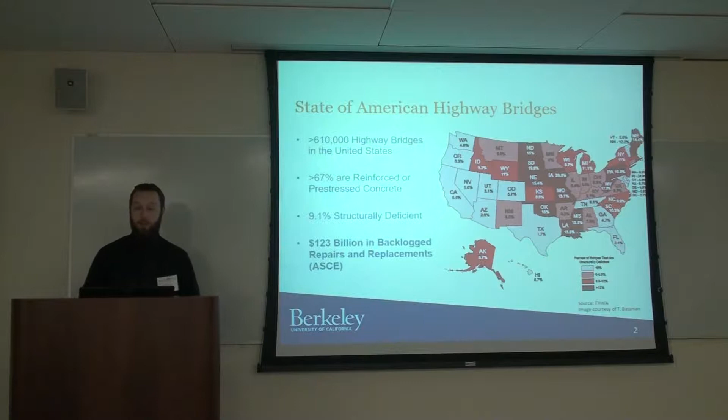Almost 10% of these highway bridges in the United States are structurally deficient, meaning that they require significant repair or replacement. The ASCE estimates that there is about $120 billion in backlogged repairs and replacements that have yet to be undertaken.

When we compare these facts with the USGS seismic hazard map of the United States, we can see that 34.7% of deficient reinforced concrete bridges are in states with high seismic hazard, and close to 80% of those bridges are in states with moderate to high seismic hazard.

Given that building codes don't account for deterioration of buildings and bridges directly, it's surprising that such little research exists on structural performance of deteriorated bridges.

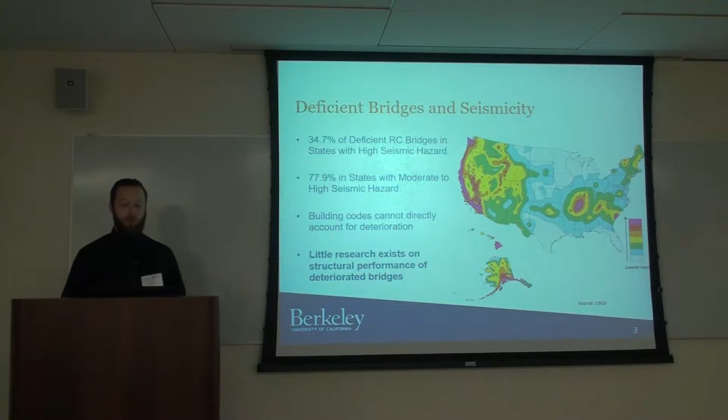Specifically, I'm looking into corrosion in highway bridges, and corrosion is a leading cause of damage to bridge structures, specifically in reinforced concrete bridges.

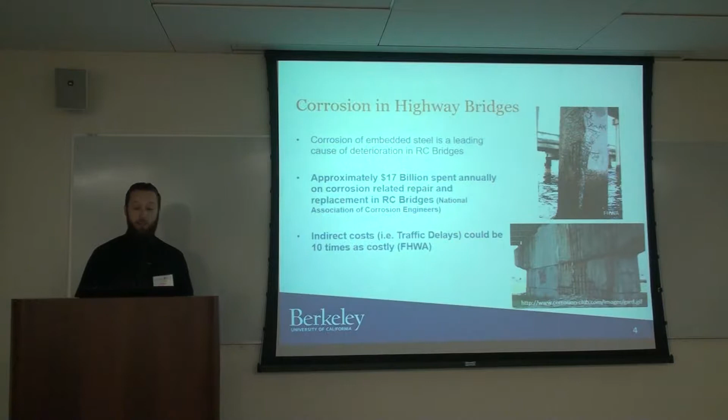The National Association of Corrosion Engineers estimates that around $17 billion is spent annually on corrosion-related repair and replacement in reinforced concrete bridges alone. If you look at indirect costs, which are much harder to quantify, the Federal Highway Administration acknowledges that costs such as traffic delays could be 10 times as high.

I know this isn't a corrosion conference, so I'll try and get into the hybrid simulation aspects, but briefly I just want to touch on a little background. The corrosion process in reinforced concrete can be broken down into two stages.

You have an initiation period where the reinforcing steel is passive due to the high pH of concrete. During this period, aggressive agents like carbon dioxide from the atmosphere or chlorides from seawater or de-icing salts are penetrating into the concrete cover and will eventually depassivate the reinforcing steel.

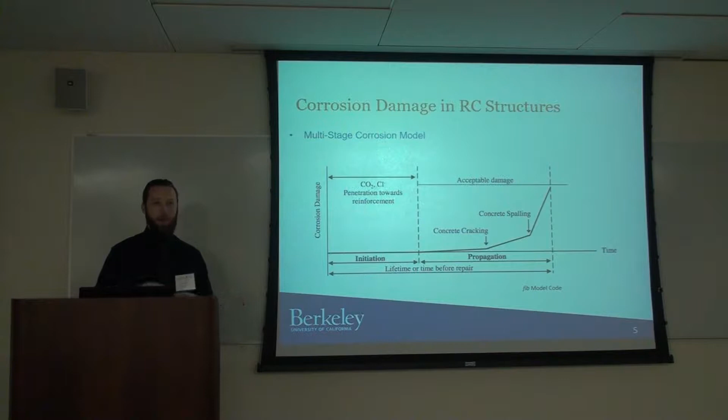This takes us into the propagation stage, during which rebar is actively corroding until you have cracking in the concrete, at which point the damage is accumulating at an accelerated rate. You eventually reach spalling of the cover, and then at some point you reach some acceptable limit where the structure either has to be repaired or replaced.

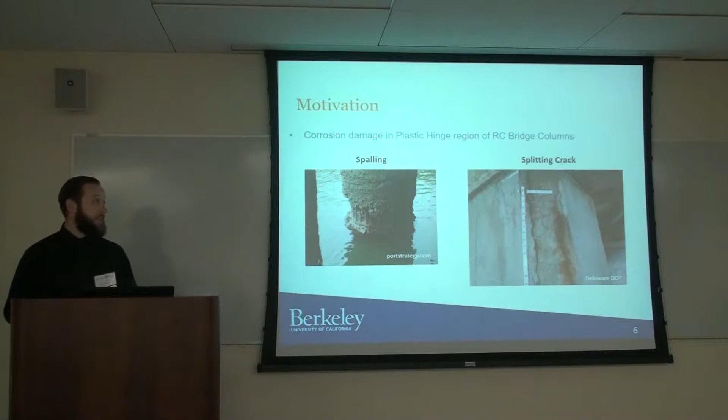Just to give you some examples of damage, here we see some significant spalling, and even before you reach spalling, you can have damage that affects mechanical behavior, especially splitting cracks, which deteriorate the bond between reinforcement and the concrete, and this significantly deteriorates flexural behavior.

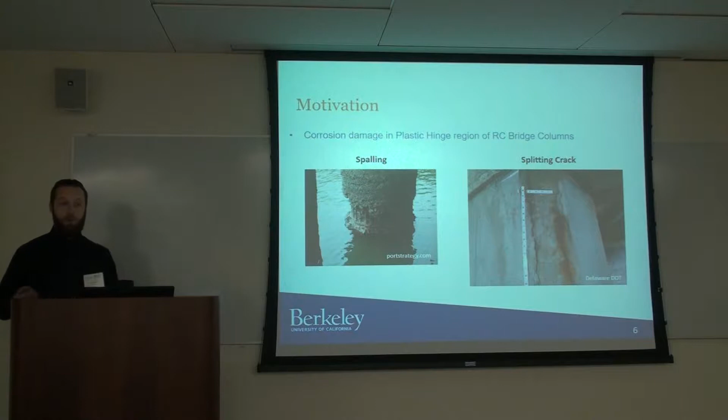This is significant because this type of damage can often be found in the plastic hinge region of reinforced concrete bridges, and given how important these regions are to drift of bridge structures, it's important to understand the interactions between corrosion damage and seismic performance.

There are a lot of challenges when addressing this problem. First is that concrete damage due to corrosion is difficult to model, and it's difficult to incorporate this into a structural model. Additionally, corrosion damage occurs slowly, which adds to the difficulties with large-scale testing, it being on its own difficult and cumbersome, even without considering complications of corrosion.

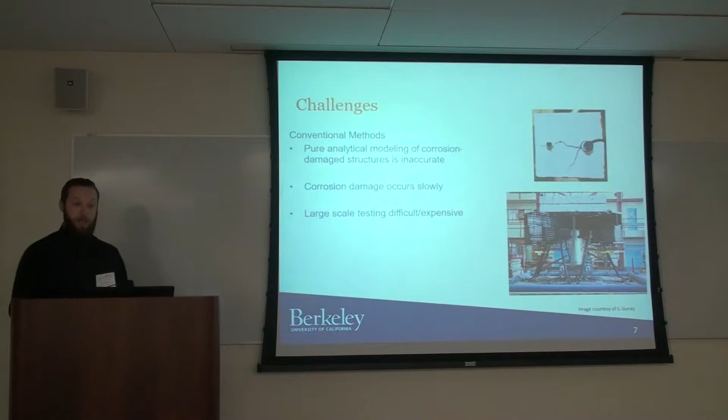That brings us to a unique solution of hybrid simulation, where we can scale down from full-scale testing and focus on just an isolated component.

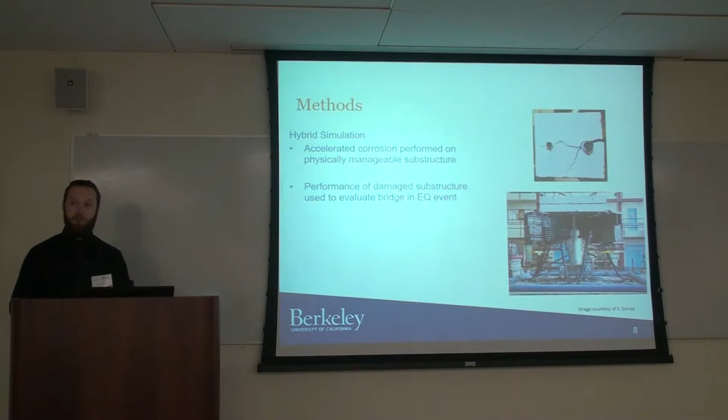In this experiment, we're considering accelerated corrosion on a physically manageable substructure, specifically just the plastic hinge region of a bridge structure. Then, after inducing corrosion on a specimen, we can use hybrid simulation to determine the influence of damage in this region on the overall performance of the bridge.

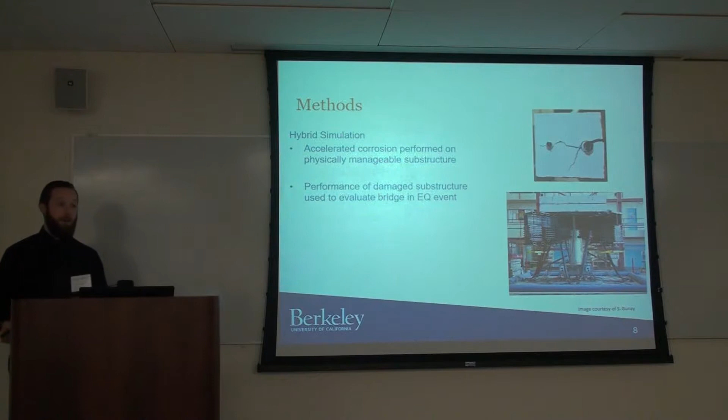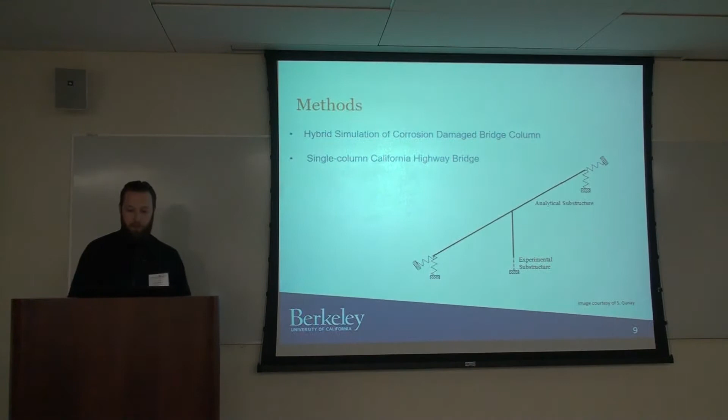So the bridge of interest that we're considering is a single column California bridge structure. We have an analytical substructure, and we've replaced the plastic hinge with an experimental substructure.

This is just a concrete column section, and it has been separately corroded with splitting cracks induced, similar to those that we saw in the image I showed before.

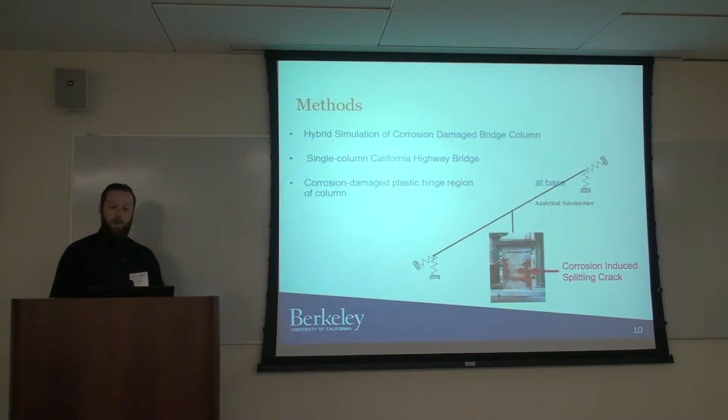If we replace this portion of our OpenSees model of the bridge structure with this pre-damaged substructure, we can capture the complexities of damage and incorporate those into our OpenSees model without having to explicitly model them.

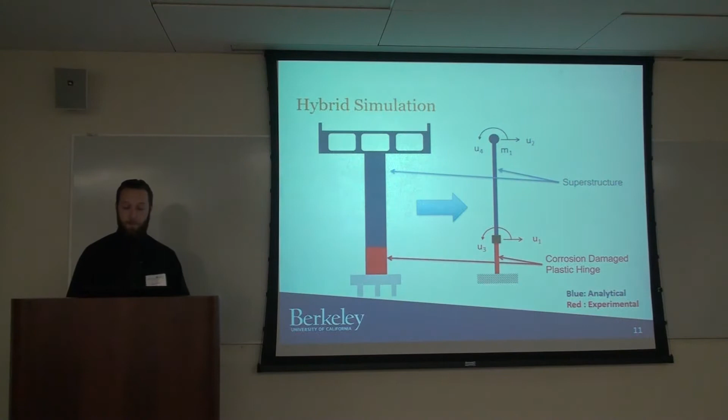The way we are doing that is we have a 3-actuator setup, and 2 actuators are used axially, applying both the axial load as well as rotation to apply moment. We have a lateral load to apply shear and also moment to the substructure.

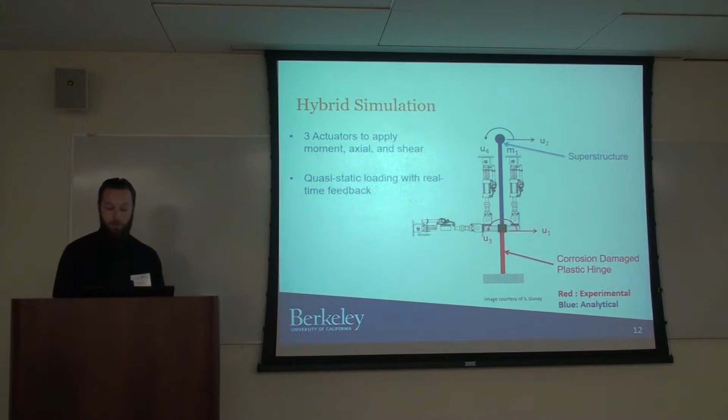A closer look at our test specimen: we have scaled down with a linear scale factor of around 8, so 8.37, and we've taken a prototype column and scaled it down to be more physically manageable.

We have a 7-inch section with reinforcing ratios shown here, and we've cast some high-performance concrete end caps to make sure that our boundaries remain elastic and don't contribute to damage that we're seeing when we're conducting the test.

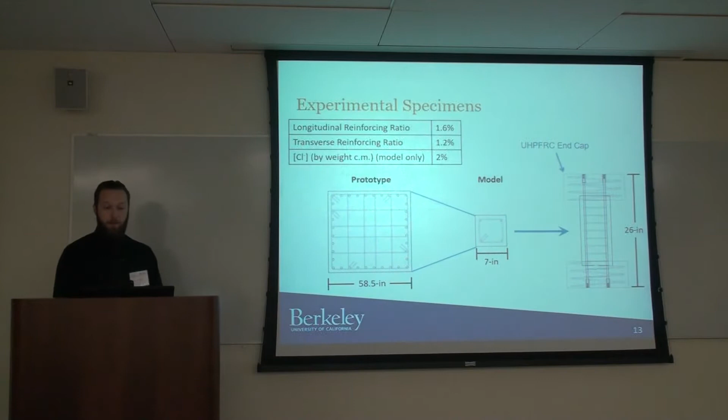So to look closely at the environmental conditioning, this is how we are applying corrosion damage to this specimen. We're immersing it in a saltwater bath, and then using a potentiostat to apply a constant current. And while we're doing that, we're measuring the potential, which you can see fluctuates here with the formation of cracking in the specimen.

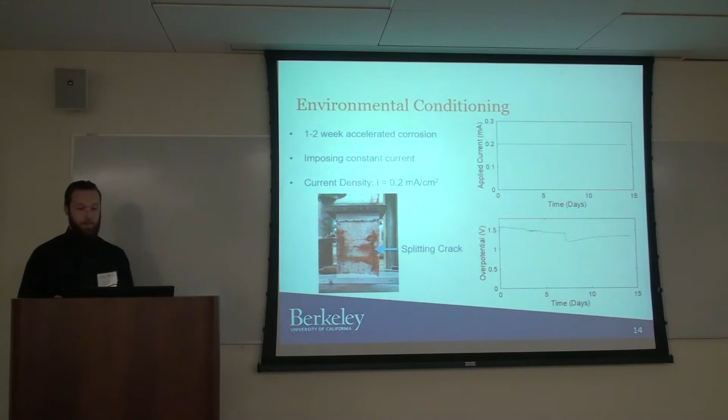Just to reiterate the importance of these splitting cracks, this is the behavior that we are trying to characterize with this study. Splitting crack damage has been shown to significantly reduce the flexural capacity of elements. So we want to see in a bridge structure what the overall performance is, and how this influences behavior when this damage occurs in the plastic hinge region.

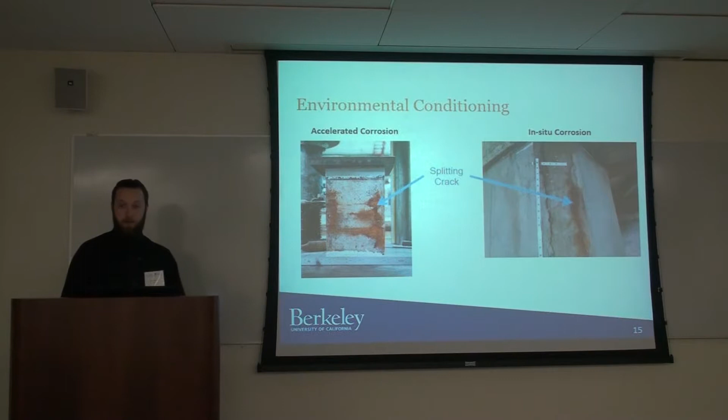So we are testing this in Davis Hall, and we're aiming to test this week, so we're testing actually on Thursday. But to give you a flavor of what the test setup looks like, again, you see our actuators in the vertical direction as well as lateral, and our substructure, which is here shown.

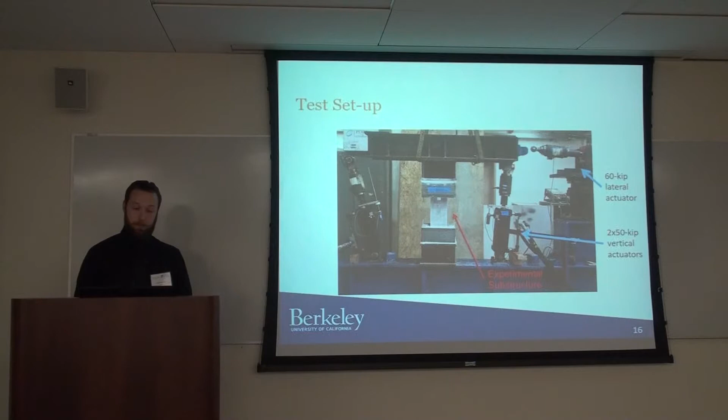And so more background and future work that can be done with this. In addition to determining the behavior of existing structures, we also see this as a great opportunity to use hybrid simulation to investigate different systems and specifically different materials and how they would perform in a similar situation. My research group focuses on construction materials, and so we like to implement novel materials as a solution to issues such as deterioration due to corrosion damage.

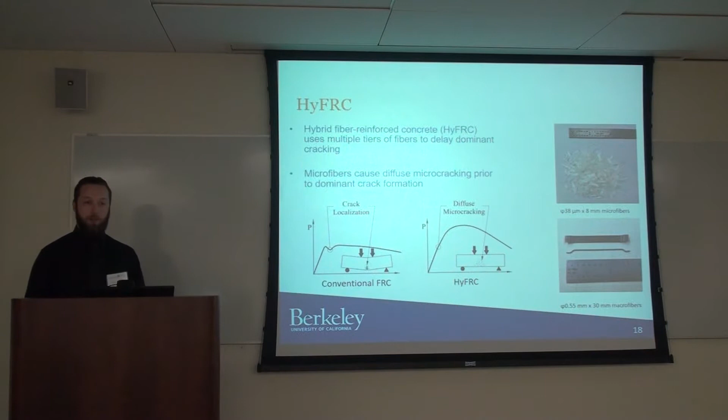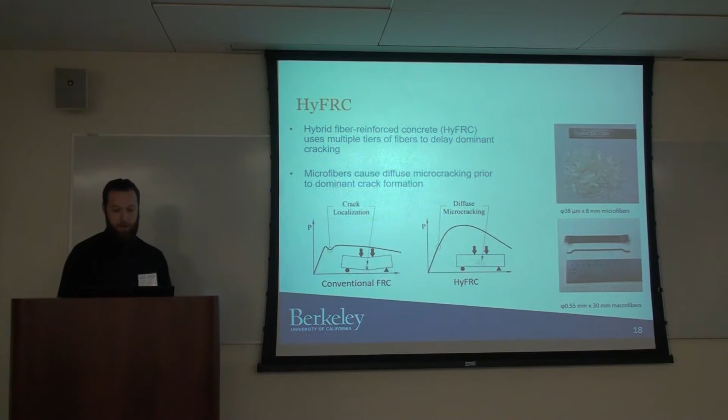So we will be utilizing hybrid fiber reinforced concrete, which utilizes multiple scales of discontinuous fibers in order to increase the ductility and toughness of concrete. As you can see in this case, the fiber combination that we utilize allows us to achieve diffuse microcracking, and that allows the material to achieve strain hardening and deflection hardening behavior, which has been shown in bridge columns to increase the toughness of structures.

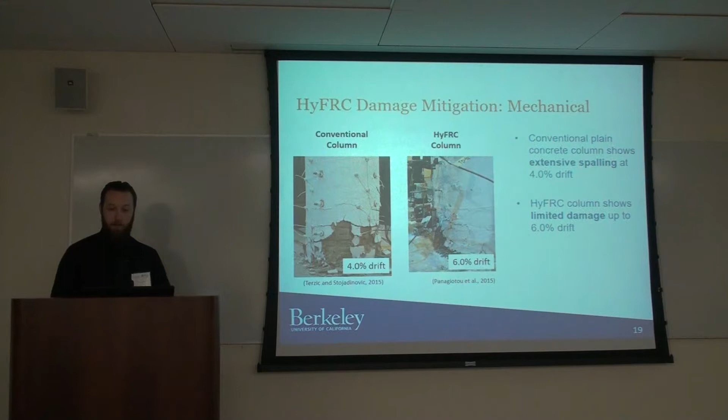So additionally, in addition to the seismic behavior of this material, it has also separately been shown to improve the corrosion behavior, both in the initiation period as well as the propagation period. And this comes down to crack control.

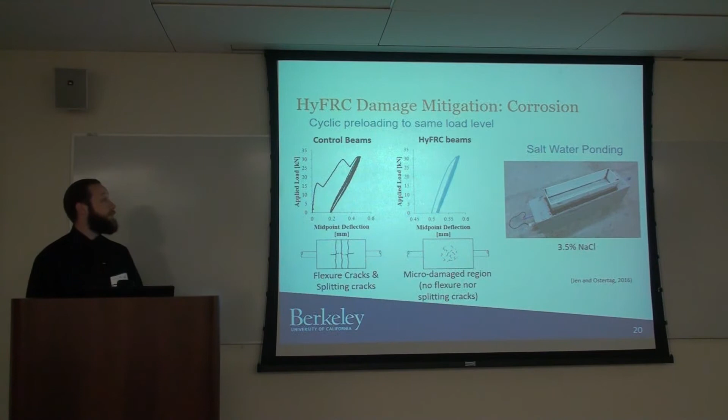So we tested fiber reinforced concrete beams compared with a control specimen, and due to this diffuse microcracking under a given loading, we were able to decrease cracking in the specimens, which maintains the concrete cover and prevents chloride diffusion under an extended period of saltwater ponding. So these specimens were, after preloading, ponded with saltwater for 2 years.

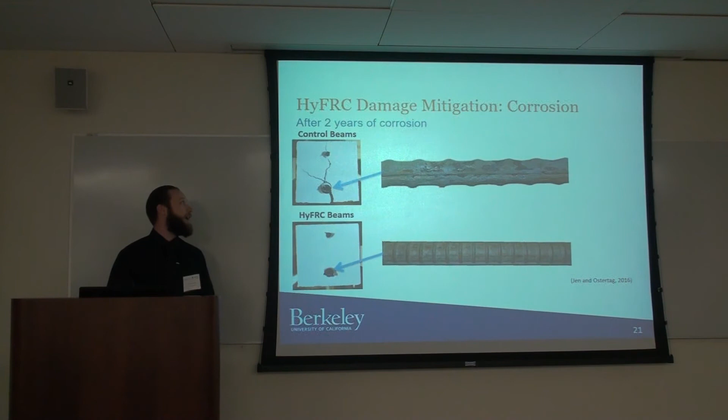And you can see the behavior: the hybrid fiber reinforced concrete beams eventually depassivated and entered the propagation phase, but no significant damage occurred over the 2-year period. Meanwhile, in the control specimens, they completely split open due to splitting cracks from corrosion. Their initial cracks were transverse and some splitting from the flexural tests, but this damage, for example, the beam being split in half, was done due to corrosion damage.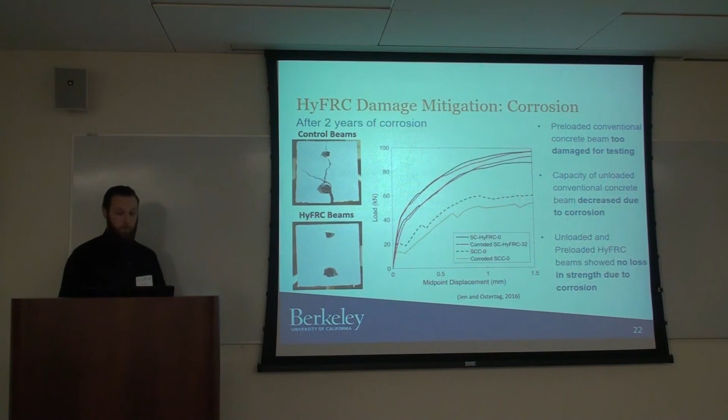And so this shows that, I wanted to touch on that, under the same service loading, hybrid fiber reinforced concrete can be used to extend the service life of concrete structures.

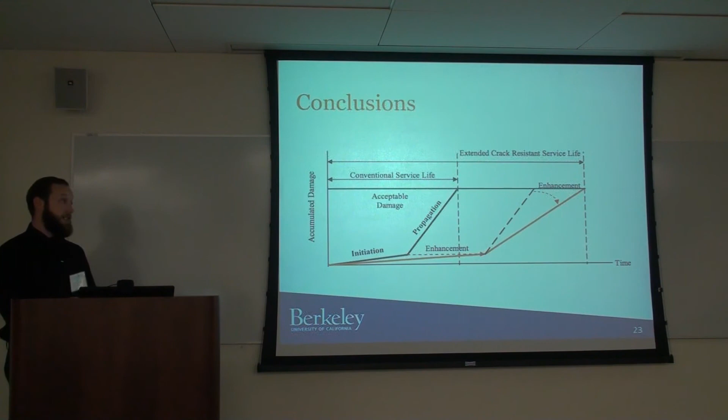And so the goal here is to apply this to bridge elements, and specifically in this case we're considering the plastic hinge. And the reason hybrid simulation is significant and important to this test is that it really is the only feasible way to incorporate this durability component with seismic testing, again due to the fact that fully analytical simulations cannot be done accurately, and that corroding a full-scale specimen and then performing a seismic test is expensive and impractical.

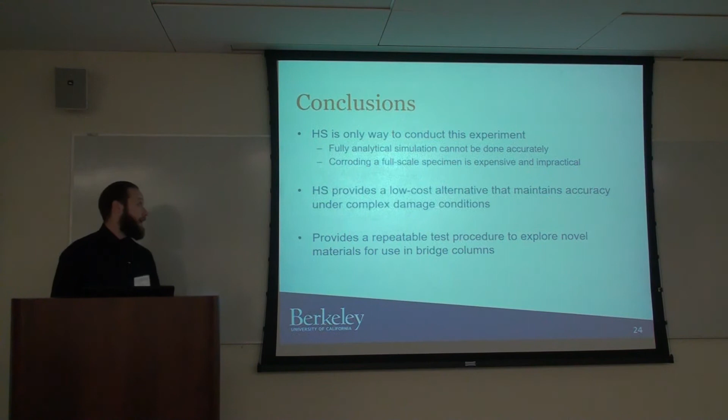So hybrid simulation provides a low-cost alternative and can maintain accuracy even with complex damage conditions. And it provides us with a repeatable test procedure to explore new materials for use in bridge columns. Thank you.